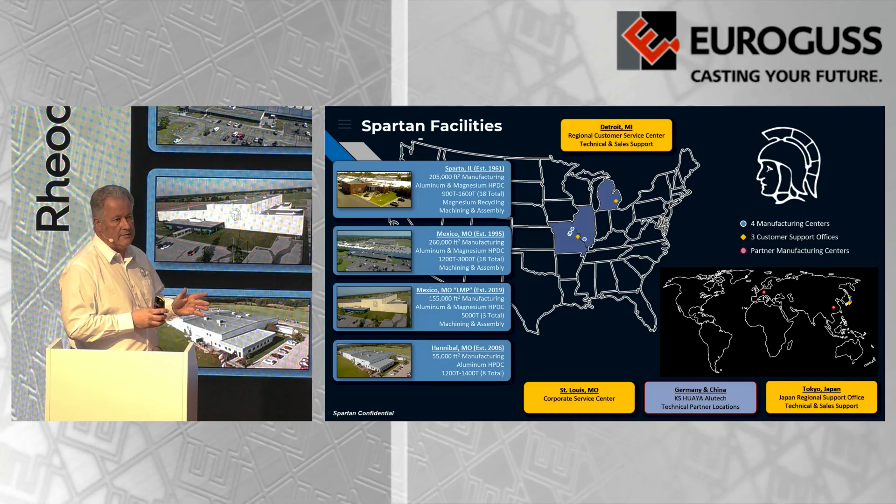So very quickly, a little bit of history into the company. We are a US high-pressure die caster. We are based in and around the St. Louis area. We have 4 manufacturing plants. In total, about 45 die cast machines ranging from 1,000 tons up to 5,000 tons. Primarily, we do aluminium, but we also have about 10% magnesium production. We've been producing magnesium die castings now for well over 40 years.

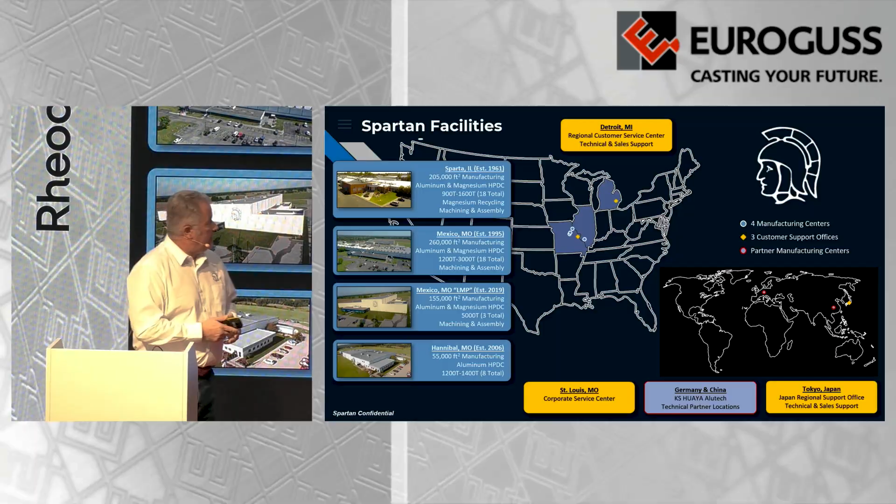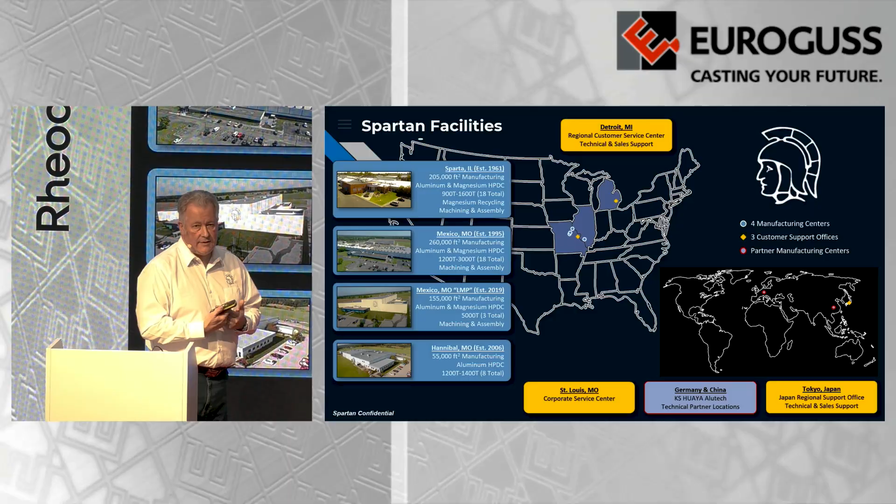On a lot of our facilities, we also do significant machining and assembly work for our customers. We're primarily automotive. We have maybe 10% in agricultural. We have support offices in the Detroit area, in Tokyo, and we also have a technical partnership here in Germany and in China with KS, Huayu, Alutech, allowing us to work on our customers' global programs.

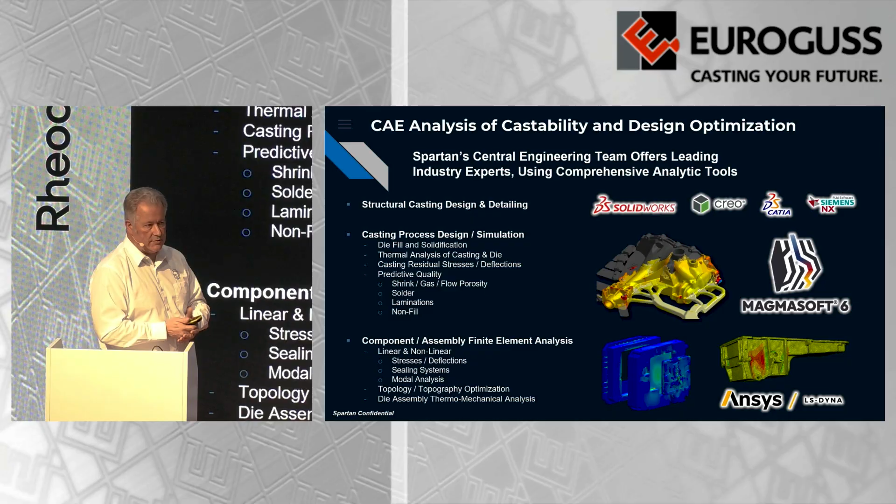Like a lot of other die casting companies, Spartan, we provide high-level, detailed, technological engineering solutions. Myself and my team, not going to go through all of that, have full development capabilities to support our customers from black box design all the way through. Now, more importantly, why everybody's here today, to talk about Rheocasting.

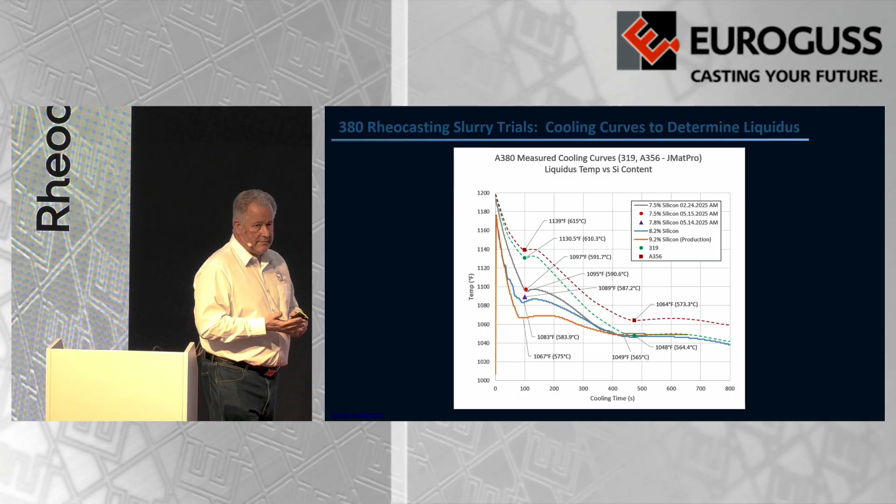So setup, preparation, allowing the whole thermal envelope of the system to stabilize before you start production, we've found from our trials is very, very important. We've been doing trials in terms of traditional powertrain alloys. We can't use, and I'm using US names for them, A383; the silicon content is too high, and that is too close to the eutectic point. But we've been using A380 and A319.

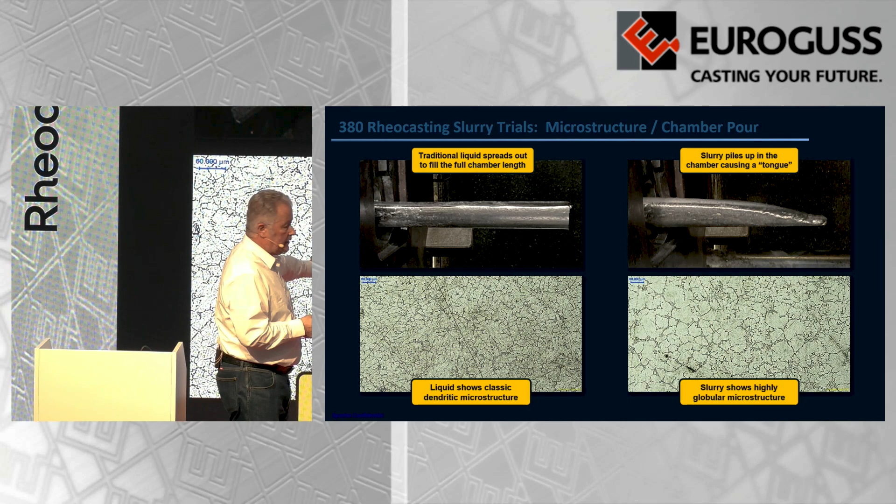So you can see here's just a couple of images of the grain structures between a traditional dendritic structure in an A380 alloy, and over on the right-hand side, you can see the globular microstructure that you have in the Rheocast alloy. And very, very different as you push it out of the shot sleeve.

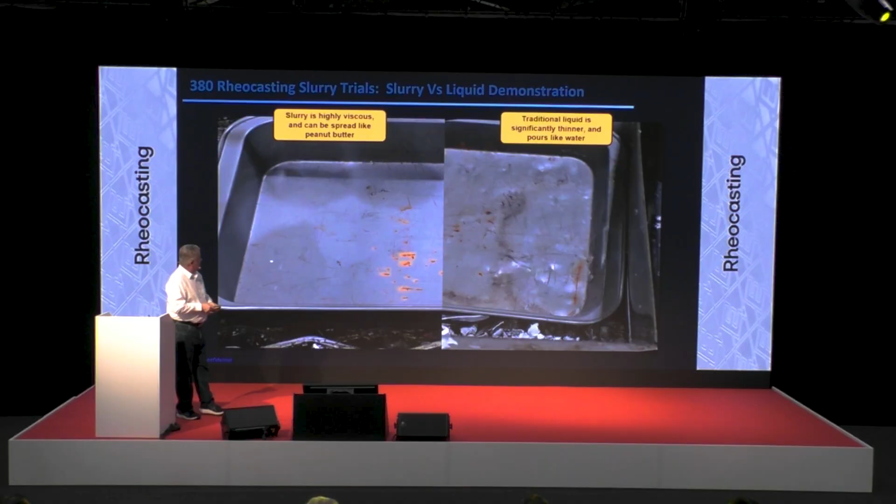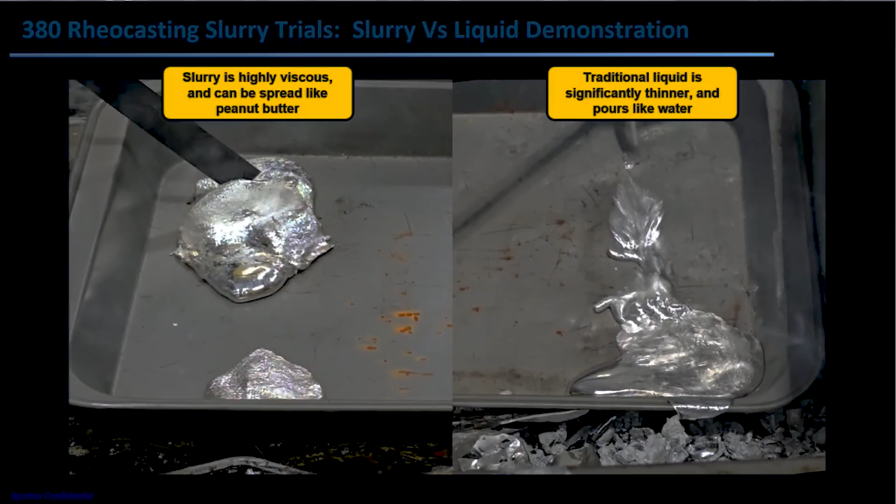Here, you can see the difference. Apologies for the quality of the tray, but very different between liquid and the Rheocast slurry, which, even though it appears to have solidified, is still movable, so you can continue to push it through the die much, much more slowly, maintaining a laminar flow with the front there.

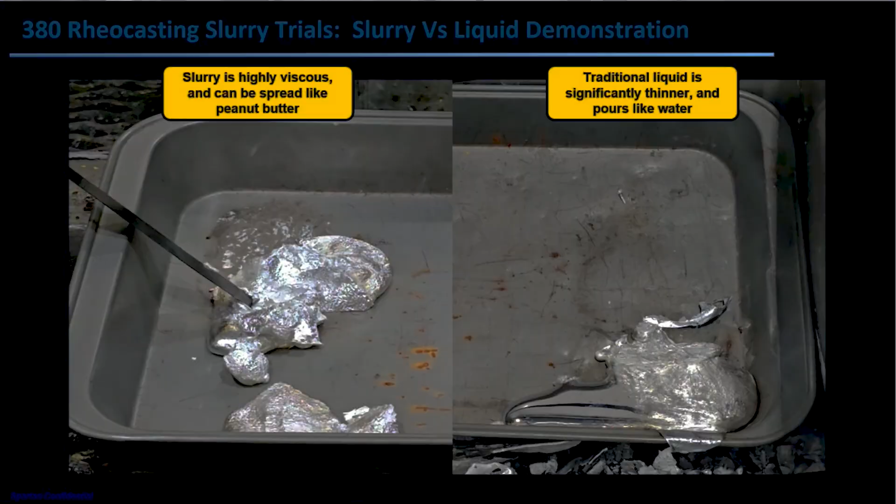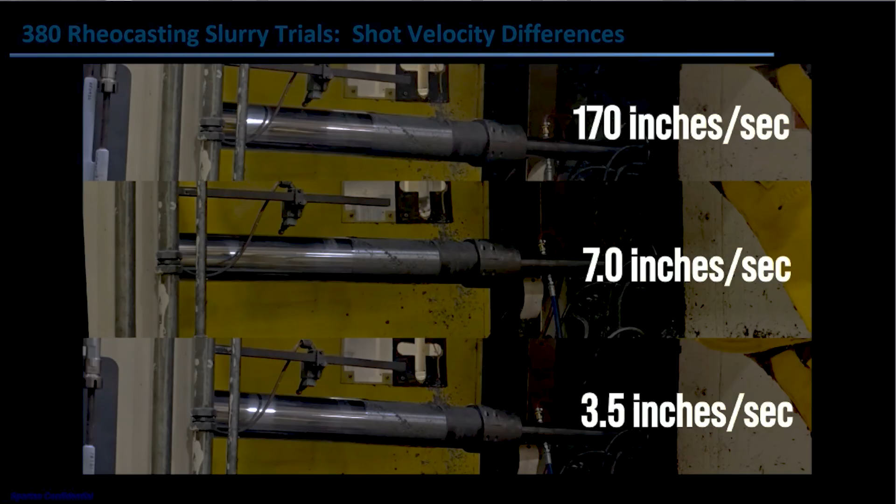Okay. The other thing to control is your shot speed. Very traditional at the top there, and as we went through our development steps, we got slower and slower, almost down to about 3.5 inches per second.

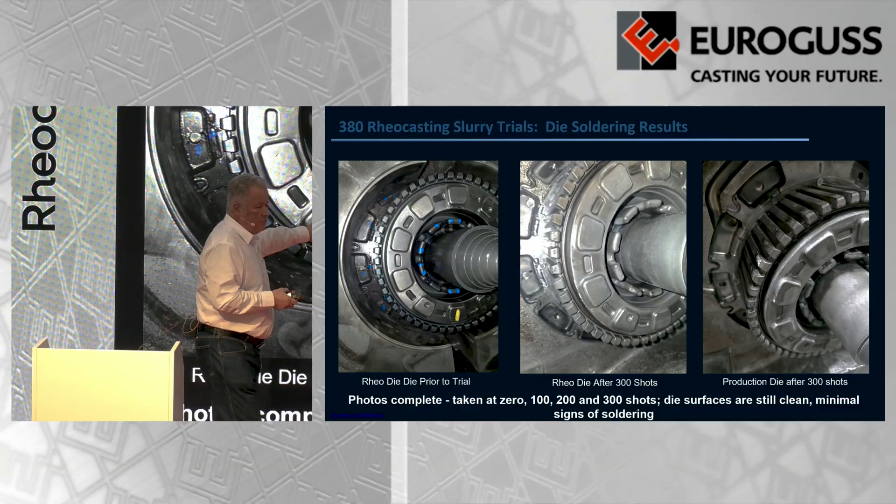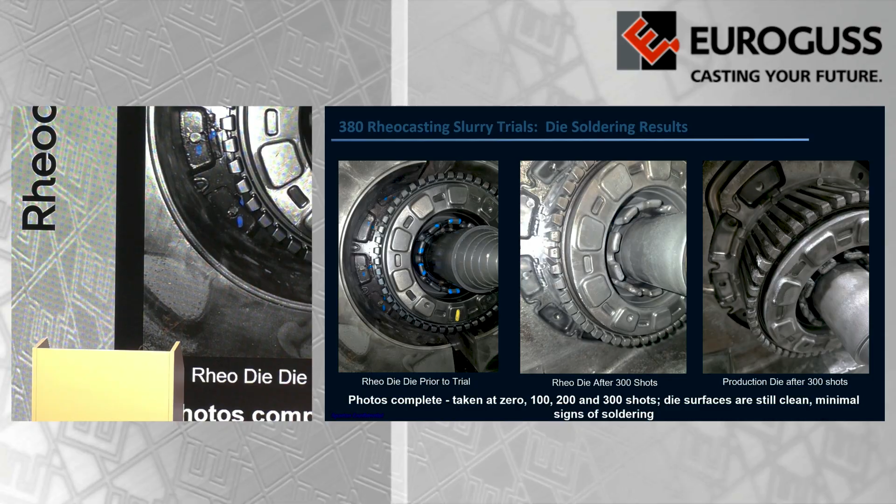Another thing I talked about earlier is the impact on the tooling. This is a brand new tool when it first went in. Then with the Rheocasting trials, you can see little tiny areas where we're starting to get a little bit of solder buildup. But when we compare that to a production tool that has run a shift's worth, you can see how much more significant buildup on the tool is. So for us, it's a lot less maintenance cost, a lot less tool work, a lot less time pulling the tool out. So real benefits there.

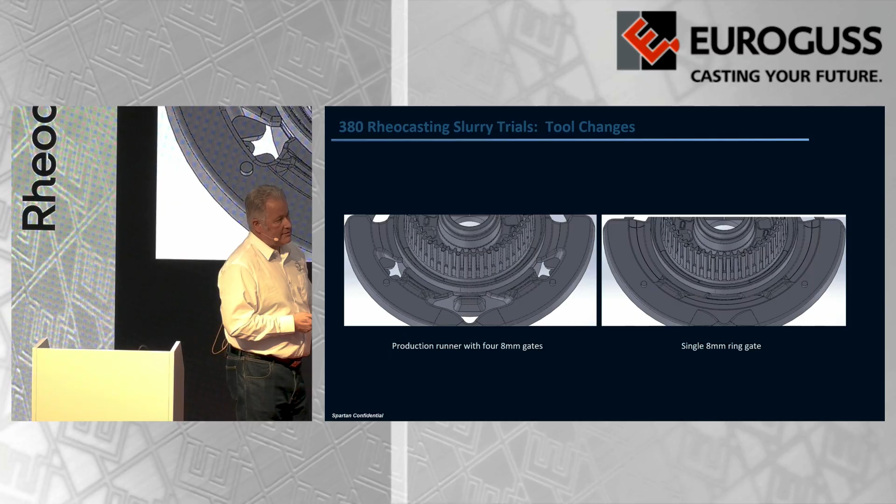Some of the things we had to do to our production die to get to that stage and to get an improved part from current production. We start with our current runner. We went thicker on the gates initially. Then we found we had to go to a single 8mm ring gate. In fact, our next iteration that we're running in about a month's time will turn that 8mm up to a 13mm gate.

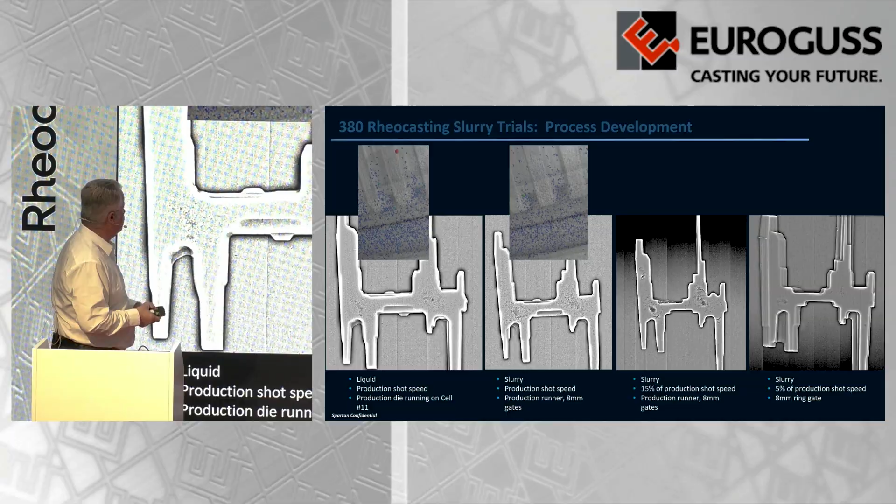Here's some of the feedback, the X-ray and CT scan results we have. So this is a production part here today. When we first tried to use slurry and shoot it using exactly the same shot speed, only very, very minor differences, slight improvement. Then we tried slowing the shot speed down to about 15%, and this looks terrible. It certainly did when we cut it apart.

And as we developed that further, we found that we go a little bit slower, but significantly open up and go to a single ring gate, so we get a nice laminar flow through the tool. We've got a much cleaner part. So you can see a couple of little bits of shrink, but that's more sponge than it is anything else, and we're going to go a little bit further than that in our next trial.

There's some more pictures here. That's the part on the right that we've been trialing it with. Production, you can see very, very scattered small porosity there. In the Rheo gate, nothing.

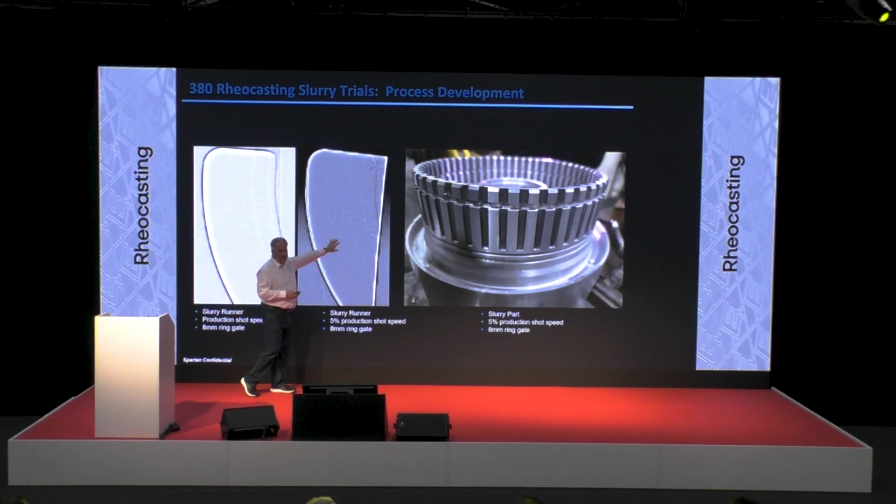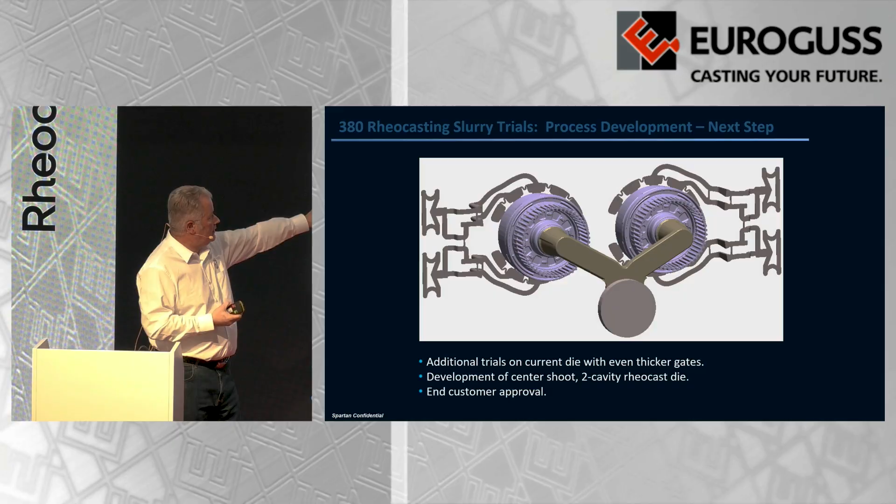Next steps for us, again, I said putting bigger parts in smaller machines. Well, we're looking to take a part that currently runs in a 1,600-ton machine today. We're going to go dual cavity in the same machine. So that's a significant cost benefit to us year on year. We're going with a true Rheocast gate solution as opposed to the modified production die. So we're going to go 3-plate center shot on that one.

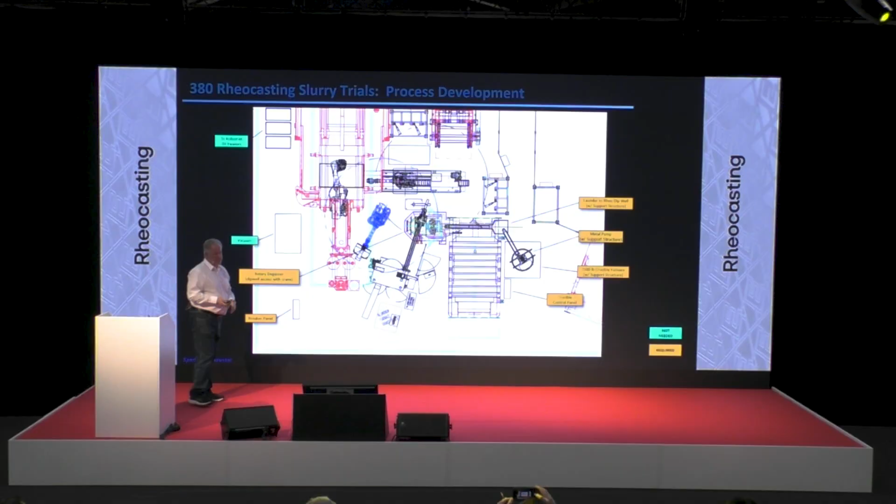That very quickly is the cell that we have laid out here. This is our normal production furnace. This is a 1,600-ton Buhler Prince machine here. And here is the Rheocast cell, where we've managed to squeeze it in. So they do fit, even in fairly mature processes. That's a picture of it there within the overall cell.